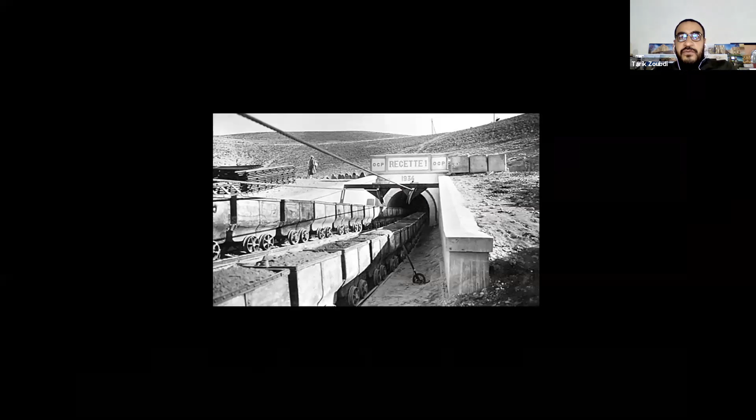Some public companies are participating in this effort, such as the OCP Group, which is the client of the two projects that I will present to you this evening. OCP was founded in 1920 to manage the phosphate mines in Morocco, and today it is the world leader in phosphate products around the world.

At the beginning of the OCP activities, the working conditions, as you can see in the pictures, were very difficult and very dangerous for the workers. This situation led the workers to fight for many years to improve their working and living conditions for themselves and their families, including the construction of schools for their own children.

In this context, we had the chance in 2015 to win the architecture competition for the construction of a middle school in El Jadida, a port city on the Atlantic coast of Morocco, located 100 kilometers southwest of Casablanca. It is known worldwide for its rich heritage, especially the Portuguese city, which is classified as a UNESCO World Heritage Site, and it's very close to our project. That's why it was the beginning of our idea.

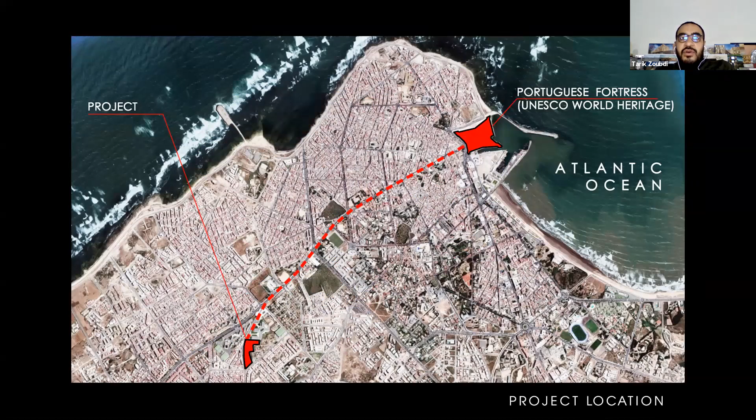In this map, you can see that our project is the second step of a larger pedagogical program in this area. The first step was the construction of an elementary school next to the workers' housing.

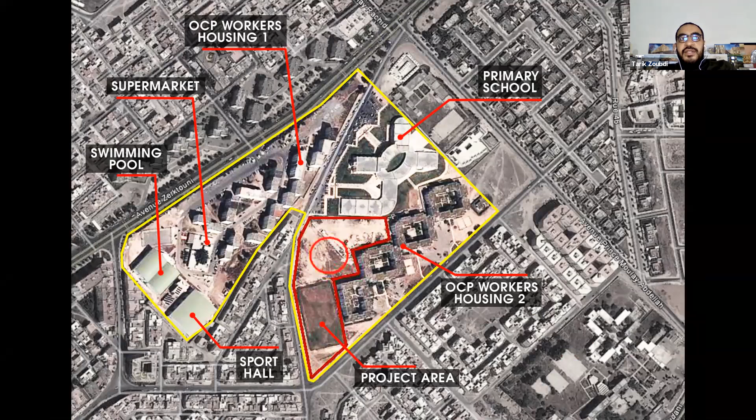The photo of the site shows two different architectural expressions: the white workers' housing in the east, and different older buildings in the west. In the southern part of the plot, there was a football field that we decided to keep from the beginning.

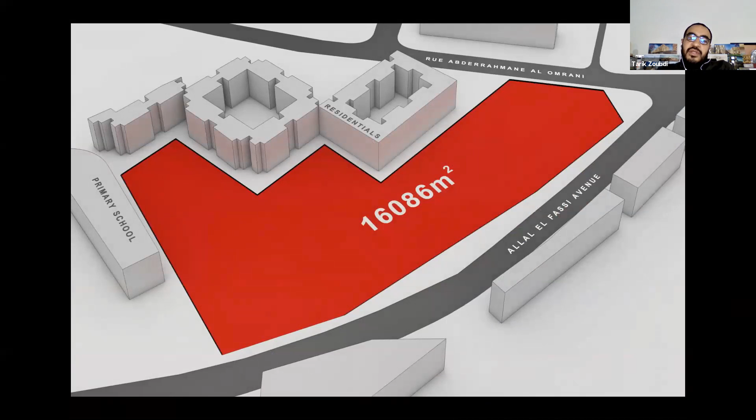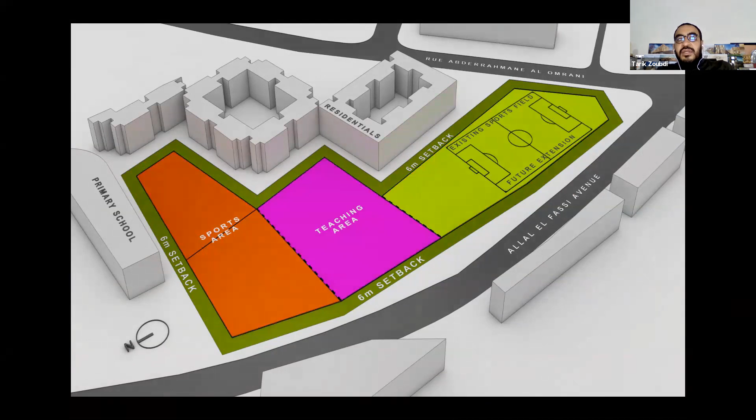This is a video showing how we shaped our project through the constraints of the context. The irregular shape of the plot led us to divide it into three parts, easy to design, while keeping the football field to serve the future building in the south.

We managed to open the views on both sides of the main building, and we created the central courtyard inspired by the patio of madrasas, those famous traditional schools in Morocco that we can find in Fez and Marrakesh.

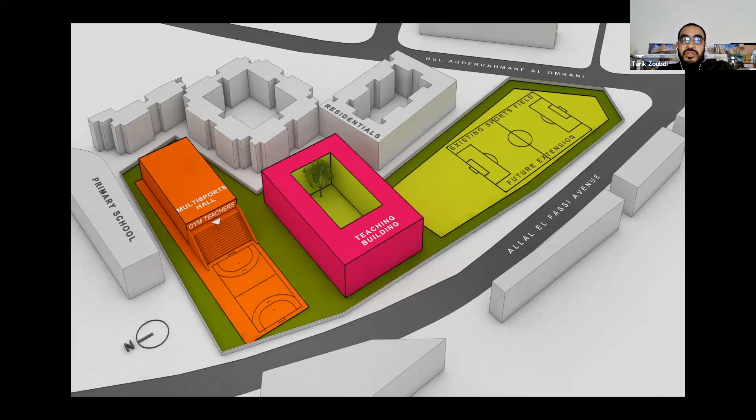We used the sports hall roof as bleachers for outdoor sport and cultural activities like music or theater, and we created a large forecourt in front of the school as a meeting space for visitors and students' parents.

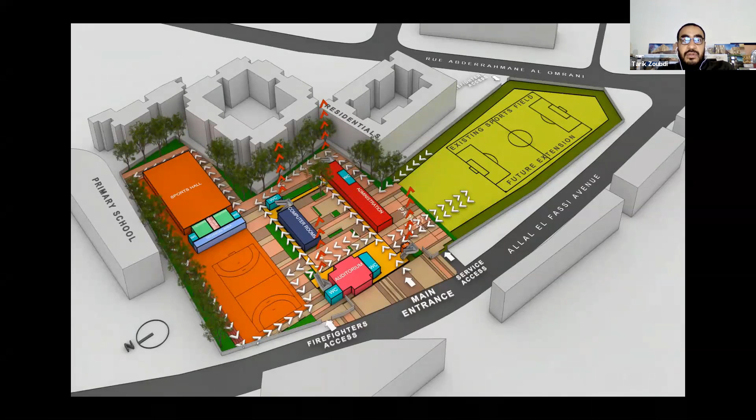We used trees as a screen in order to preserve the privacy of the neighbors and reduce noise and pollution. The project is composed of two buildings.

The sport hall is located on the north side, and the educational building is composed of three important parts: general classrooms on the south side, scientific and technical classrooms in the north, and on the west side, common spaces such as the library and the auditorium.

The main facade of the project is an extension of the square floor. It has a hermetic and protective character thanks to the use of local stone.

It is a kind of tribute - it was felt like that by us - a kind of tribute to the architecture of the Portuguese city that I talked about. The facade also contains a metallic mashrabiya skin adorned with a universal alphabet to symbolize tolerance.

The lobby was designed to be open. A large part of the auditorium on the first floor is overhanging to free the entrance space from walls and columns. We tried to create a unique atmosphere in the space thanks to the play of light and shadows, as a symbol of knowledge.

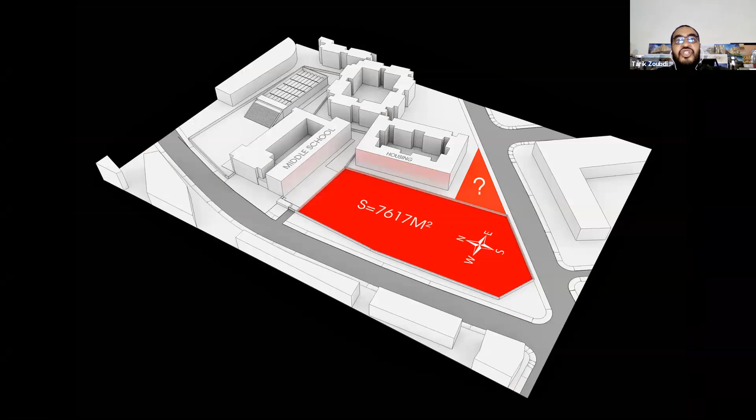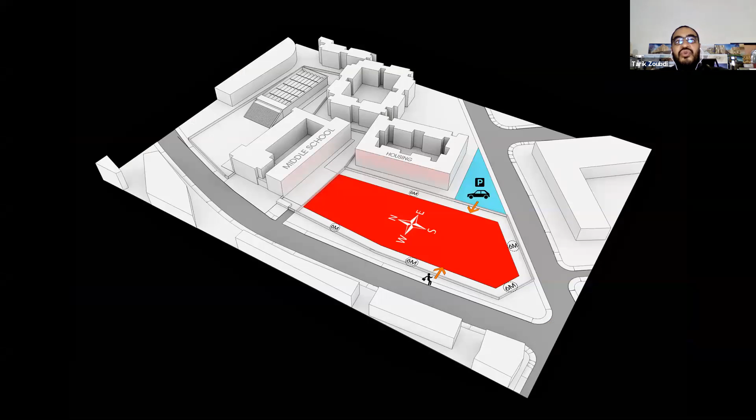The large pedestrian axis has been placed away from the parking, which you see in the blue part, and we did that to ensure the safety of students and to reduce the number of cars in front of the main entrance. In order to simplify the management of the number of students and staff, the school is entirely autonomous.

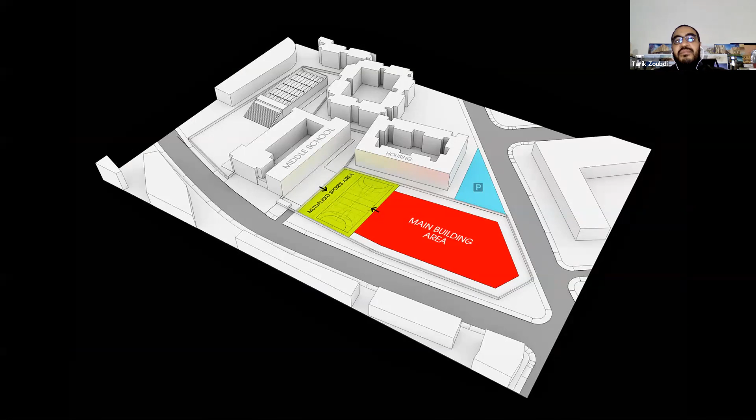However, future students will have access to the sports hall and auditorium of the adjoining middle school, the first one, Wall of Knowledge.

The sport area of the new part has been placed in the middle of the two buildings to allow its sharing between middle school and high school. And for more safety, it remains accessible from the college or the middle school through an interior door.

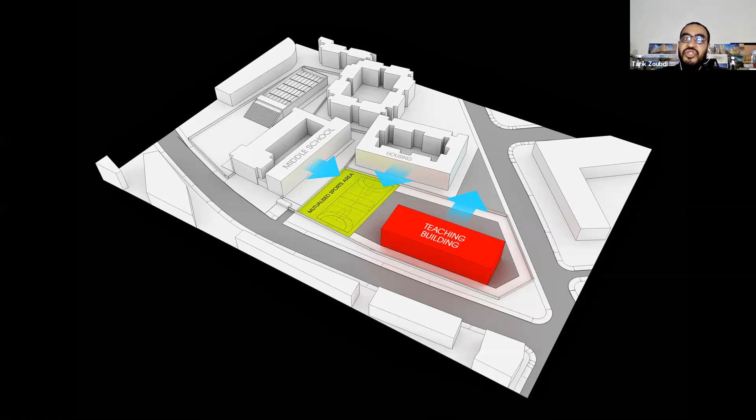The location of the teaching building was chosen to provide unobstructed views from all the existing buildings, especially from the workers' apartments. This decision made it possible to decongest this area and ensure good cohabitation between neighbors.

The compactness of the project allows us to shorten the distances traveled by users.

In front of the main entrance, a large public square acts as a transition between the high school and its surroundings, encouraging social contact between parents while providing a safe space for children away from vehicles when leaving classes. The large forecourt serves as a mineral carpet that highlights the architecture of the building.

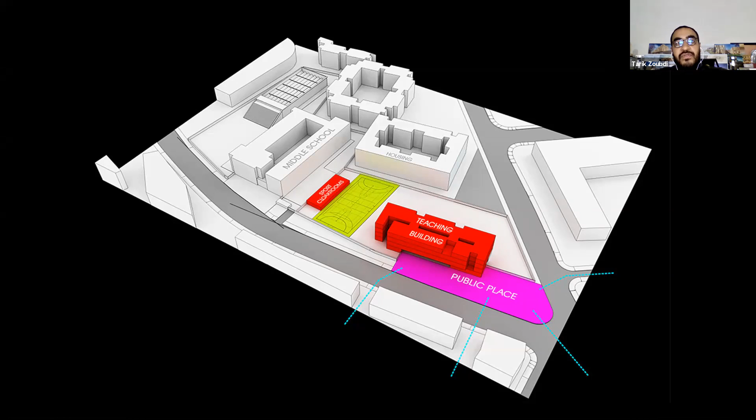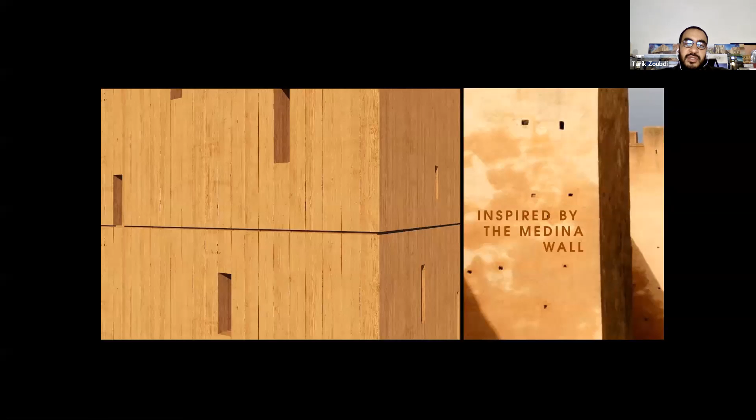This is a small video showing how the architectural heritage of this city was inspiring for our project.

It's especially about the use of the character of Portuguese city walls in the drawing of the stairs, and the white screen on the facade is inspired by mashrabiya.

The combination of different types of concretes pays tribute to great masters of modern architecture in Morocco, like Mr. Zevaco and Mr. Azagury, or Faraoui and de Mazières.

To integrate the building into its context, the architecture was inspired by local heritage, as I said, of the Portuguese city, drawing its inspiration from the city walls.

The staircase takes charge of vertical movement as a symbolic existence with a strong centrifugal force, so that it could be seen from the outside.

The white envelope of GRC panels plays the same function as the mashrabiya, as I said, but as protection against the excessive heat of the sun and also as a screen sculpting the daylight, bringing poetry and spirituality inside interior spaces.

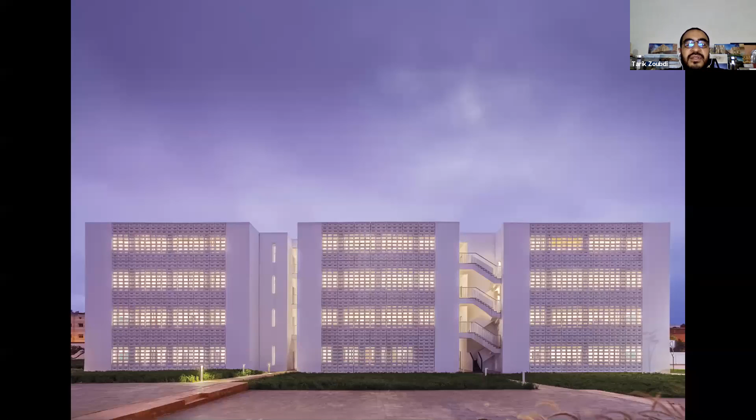The parametric design of the GRC veil is revealed at night by the interior lights, giving life to the monolithic masses that form the building.

I want to finish with a sentence in Arabic, if you let me. For me, it's the most important idea of the two projects.